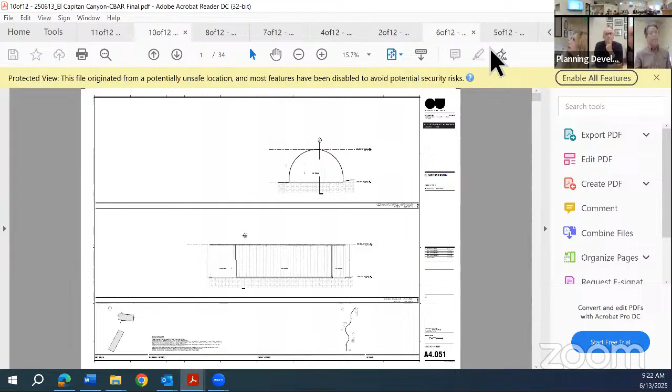Yeah, do you want to start at the very beginning? Okay. It might be easiest just to start wherever you want to. You want to go to section 10 and then we can get through the meat, and then we can come back and recap and go through that. All right, so section 10.

Unless it's Alan, you may not have been here during the last one, but we did have some comments about how the exterior was going to be detailed, some of the wood siding and some very specific things to make sure it's detailed right. So right here. Yeah, let's do 10, and if you can continue a few pages and get into the details, I'll start with that, and then we can go back to the beginning and do the full page flip, going to the 3 series.

These are all the technical building sections and elevations that you saw last time. You'll know when it gets boring. A couple more.

There you go. Whoa, back up. Yeah, go back. Okay, so when we were here last time, we were a little light on details, but we wanted to make sure that we were on the right track, which it looks like we were. So we've now invested in a lot of the detailing.

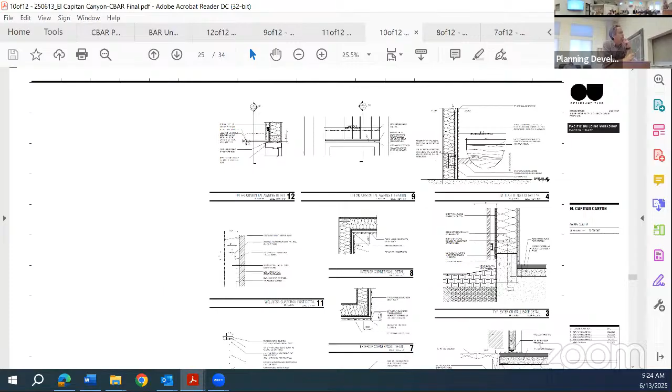If we zoom out a little bit and scroll down, it's really just all of the cladding and how the deck materials here are flush with the buildings themselves. Some railing details, but a lot of this has to do with all of our wood details like that.

This next sheet is the other one that was curious about. We have an integrated gutter detail and all of our roof detailing.

Our materials board - you've seen this one and approved it in the past for other elements of this project, but we had to rebuild it. We lost it after the last CBAR. I think it stayed here too long. So we have the same simple palette you've seen over other areas that have already been approved and are in the building department: cedar that's weathered, Corten steel roof, and bronze windows and door hardware. It's a real basic, simple palette, if you guys want to refer back to that.

We're not doing any eaves here on this part of the project. It's a wildland urban fire interface, a nice detail for us. It keeps the building really clean. You'll remember this is just a landscape driven project - a huge property with lots of trees in the surrounding areas. So these buildings are kind of background when you see that landscape.

Ready to spill down? So that's where the hidden gutters are. We have some living roofs - we've eliminated a bunch of them, but where guests or the public can look down onto the property, we felt it was really important to keep some of the living roof visible in some areas. So there's some of those things that have been figured out in coordination with waterproofing and landscape, and all of our other standard details.

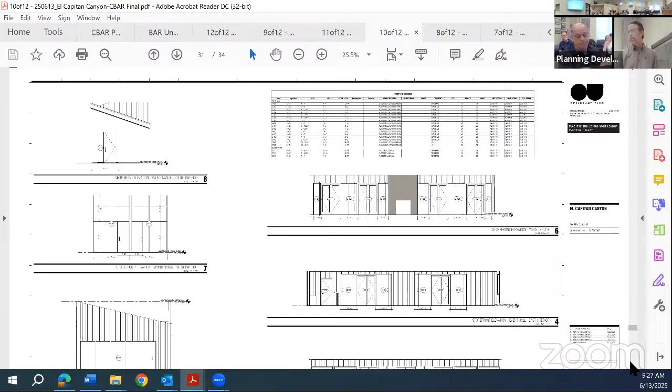Well, that's pretty much the level of detail we have. All these buildings are really similar, so we're reusing a lot of the details because there's continuity throughout the whole property. A lot of these details you've seen and approved at Area F over on the east side of Coastal Terrace, so there's really not much new here to see.

While we have this up - oh, here we go. This is the other one that had a specific comment about the window, so we wanted to put that up and make sure it's clear that's how we're doing it. Nothing new, didn't stumble across anything, doesn't change any of the designs you've seen. Just exciting roll down door details.

While we're doing the meat of this one, which is new material, I think you may want to go to number 11, and we can let Derek talk about the landscape details, which have already been approved, and then also show you the tree replacement plan, which is a really important component of this. After that, we can go back to the beginning if we want. Derek's got a hard copy of it, and I believe it's after this - oh, it's 12.

Number 12 is the tree replacement plan. This slows everybody's computer down.

It's a little hard to see, but you can see here all these little dots - those are all new trees. If you look at the interior of them, it identifies the tree by type and by size. So the important thing for you guys to know is that we aren't proposing any removal of native trees throughout the project.

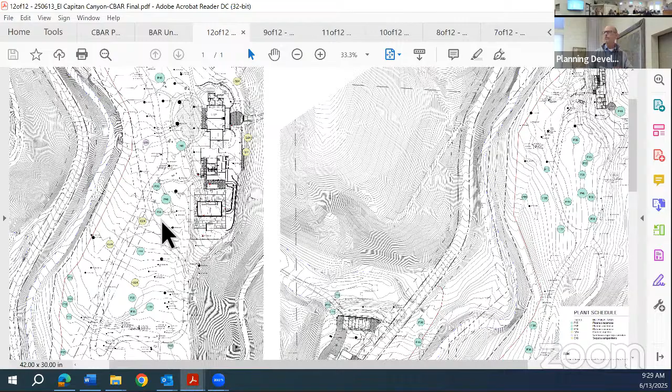Yeah, this is the whole project. This is all of it. That is awesome.

You're not used to seeing the whole project area squeezed under two images, but you get the idea. Thank you, thank you. I'll leave it up.

So let's see, I think we're still in landscape details. Do you want to go back to the beginning and rehash it? Start at the beginning and go through everything, because this is for final.

So when we came in for prelim last time, as you're teeing this up—we've been in and sort of know what's coming—we had a pretty advanced set last time. Anything that was picked up in the details didn't merit any changes to what we saw last time in prelim, or approval on prelim.

Orientation for everybody of El Capitan Canyon. We're here at Area 1. I think you guys have all visited these. We'll just keep it going for our talk.

The first set comes from Civil, and as a reminder, you can keep flipping through these. This is showing all of our constraints mapping for flood, riparian area, oak woodland, and everywhere the early siting was approved and how it was all determined.

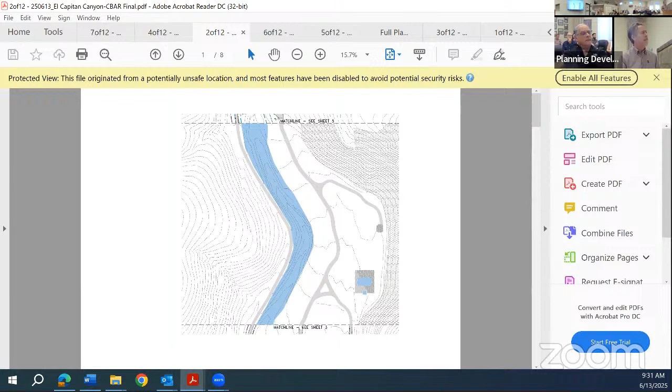Being really careful about the habitat, topography of the canyon, and what's existing. No changes to anything in there.

This is the constraints map. Everything on a white background is a safe zone to land. All the previous approvals were approved.

Previously, what we just saw was the night sky lighting diagram and the materials, which you see in physical samples up here, and here's some more illustrative examples. This is on the landscape side—the materials of the entire landscape palette and all the fencing.

The first section we look at is a back of house area with a maintenance building and a cart barn for all of the electric carts as we electrify and remove cars from the canyon. There's existing conditions which you guys toured and wanted more information on at one point. This is what's there now.

And this is what's going to be there, which is a shop facility, and an area to rent bicycles or e-bikes or other ways to get around without a car. So you'll see some images of that.

These things pop up, and there's still some cabins in this area as well. But this is all back of house.

This is more of a due diligence item. Understood.

So here's the architectural details of these two structures. This one is a Quonset hut—it's simply a corrugated arc with a roof.

And we're getting into the site plan of the family pool. Oh, here we go—here's the rendering of that back of house building. Again, it's actually much more dense with landscape, but we wanted to show you guys the buildings in these renderings, so we've cleared out a lot of the landscape so they're visible.

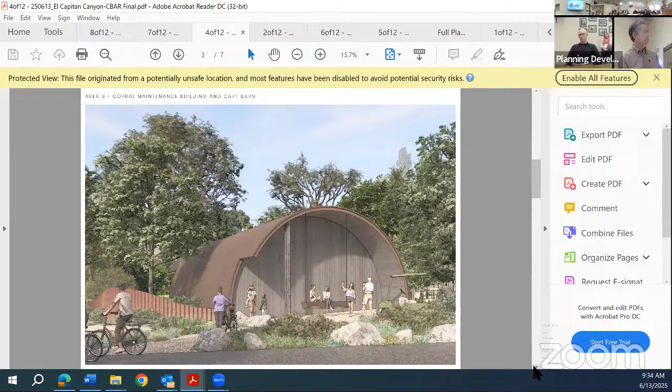The bare bones forms of these buildings, so you can see all sides of them in context. The elevations flattened out don't show a lot of articulation.

Existing pool, totally overcrowded. So we created a family pool—it's a little more friendly to children and infants and all that.

So it's a picnic area, playground, lots of natural features for kids to run around. And that's a shallow pool—goes from 0 inches depth, kind of slowly sloping down, so it never really gets a deep end or anything like that. All the lighting's shown throughout.

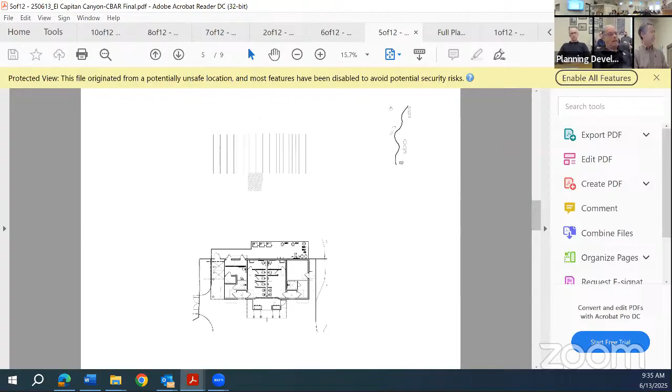There were some comments on the lighting. We brought all that in, had all the photometrics done, so that all seemed pretty good. And of course, you guys all know, as I've said over the many years, we're trying to keep it dark.

Next up, the canyon is kind of the largest site for events. It's a recreation hall, which is where the original, existing assembly spaces you guys have seen are kind of makeshift tent structures. That gets replaced with an actual recreation hall that has some food service, and there's a pool there that's more of the adult pool, but everyone's welcome there. So this is that section.

And this is the area where we did some ash trees and neighbors. The same information might be in the next one, just not illustrated, so we'll try to move on. Not as sexy, but you can see in the red X's where those ash trees were. And the same footprint of what you visited already.

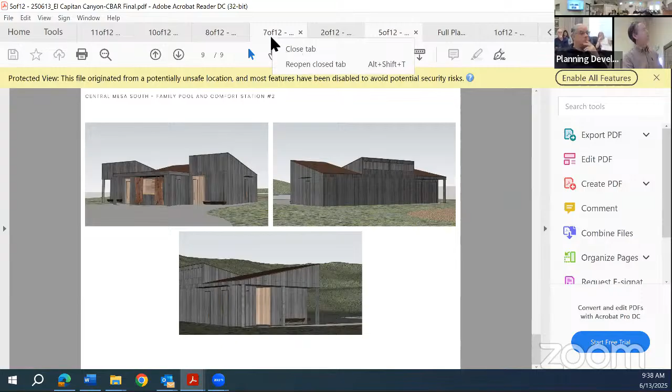The north part of that complex, which is the assembly area. You saw last time we had confirmed since then all the ADA and access and paths. That was the one thing that Freedom was going through, doing all the accessibility layer to the whole property. It added a little bit of work previously, but all that was accommodated.

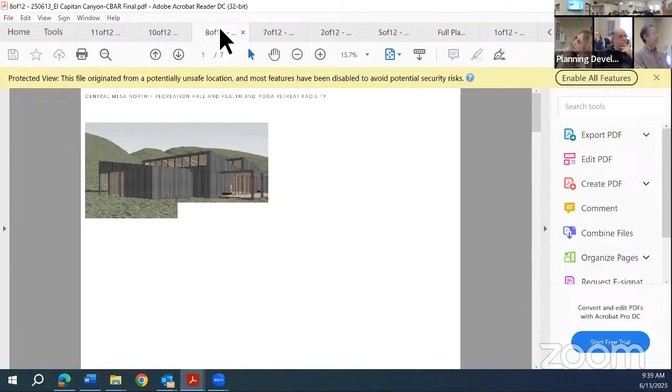The south end of that complex, the second building there, has the pool, fitness area, and kitchen. The pool will take some of the pressure off of the market and restaurant down in the coastal zone, which will probably be returning pretty soon. Much shorter set.

Okay, at the tippy top of the canyon is the wellness center. So when we were here for prelim, we had some ADA and access issues on that, so we had to adjust that building in the last one we presented. And that's all worked out just fine in details, with all the other consultants - structural and civil. So no changes to this either from the last one.

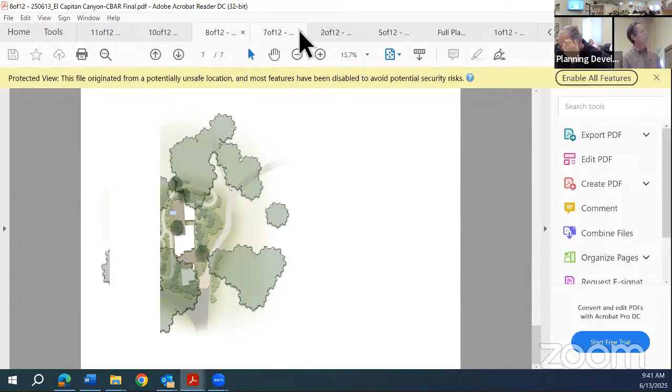Nine. There's one closer to seven. And we looked at ten already. So this is the layout for that wellness center with all the ADA paths that really have an impact on us. But as always, everything that comes up, whether it's comments or things like this, those get incorporated into the projects.

The trees don't look the same, but you can use your imagination on that - they're feeling a little bit like tree houses. And this is where we picked up really for the meat of this presentation - the final details. We have illustrative materials, and we also have more technical elevations through these sections, again from last time, just to make sure there was total clarity on what everything is and also what materials are where.

And we did ten, we haven't done eleven. Eleven also had no additions - landscape, Arcadia, as usual, was ahead of the game and had everything already detailed in prelim, so nothing was missing. So that's kind of it on that one. Was that it? I think we've now touched every page. Any questions?

Do we have any public comment? If you're online and wish to speak on this item, please raise your hand. We don't have anybody in the audience with a raised hand and no public comment online. Okay.

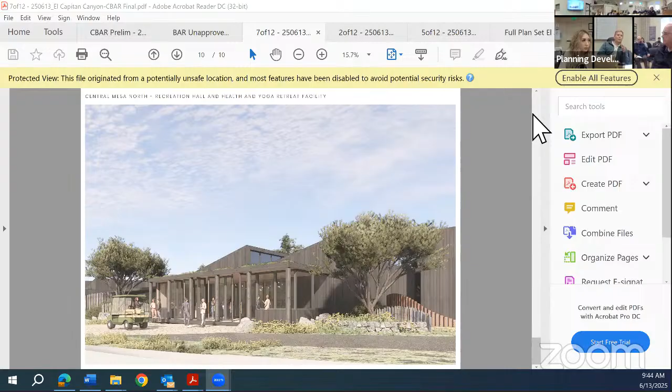There were a couple of options shown for corner conditions of the wood and how it interacts with the corner - miter versus flapping, with soffits doing one thing and walls doing another. As a final point on what we were talking about last time, just be careful about where the miters show up - I think there was one soffit that showed a miter, which isn't ideal. Miter is actually pretty risky when overdoing that. So we can pick - totally, miters are especially risky at those lengths. Take a magnifying glass over last time, but I appreciate the thought you put into the variable size of stuff. And that corner detail, we just wanted to leave it in there because maybe we want a full board on one, or maybe the one that's too wide we want to split it - so that's why we put them both. Okay, but I don't know that specific - I haven't looked at it, so just something, you know. Yeah, I appreciate either comment. Needs a red mark.

Any other questions? Bethany, was that a formal comment? And if so, could you repeat it for me? No, it's not a formal comment. Okay, thank you. I'll make a motion to approve. Second. Any further discussion? All in favor? Aye.

Okay, thank you very much. We're used to saying if they will see you for the next one, but I guess there's no next one. Not on this one.

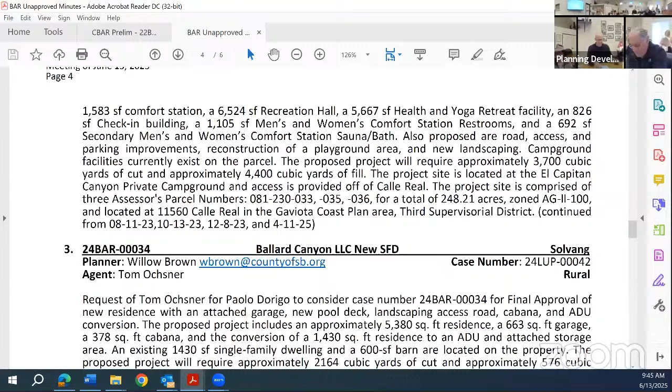Item number 3, Ballard Canyon LLC, new single-family dwelling, 24 bar 34. Is Tom online? Anybody here for item number 3? Yes, there you are. Thought I saw you.

So, the comments from last time: on the north elevation, be careful with the height limit lines. Change the light color plaster within the gable on the east elevation to match board and batten. There was a lot of discussion about this, but it sounds really fiddly, though I think it pulled everything together. Compactness and site planning is a positive with respect to the hillside ridgeline. Consider how color ties into the fenestration and details. No glaring problems with the architectural design, pleasant project. Reduce lighting around the building and make it more discreet, more sensitive to the surrounding area—for example, eliminate landscape lighting on the wall near the pool. Just as an example.

All right, will you walk us through those comments? Is it divided into, what, how many comments do we have? Five. Okay, let's go to civil part 2, civil landscape part 2. I guess there's two parts to each. And then I'll go to the architectural, the fourth one—or, oh, was the architectural in one? Let's go to the second architectural one. Let's kind of put it together.

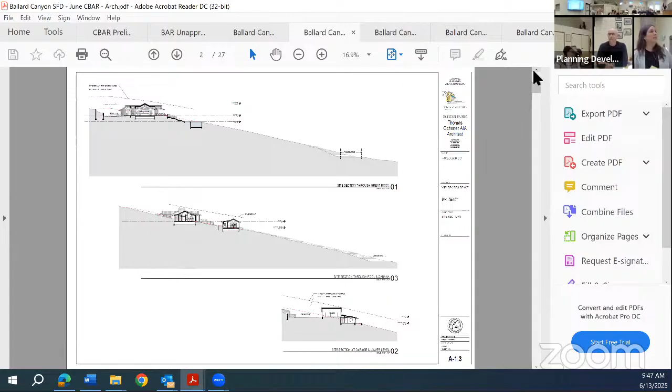So we added a few of the proposed height limit lines where we have the drive court area. This is that height limit line at the drive court, as well as, if you scroll down to the lower section, we added this for the grading at the drive court for the proposed grade. And then we're also showing that on the section. So let's go a few sheets down, past the civil.

That's your exterior lighting too, isn't it? Yeah, I think we'll do the lighting last—I'll just go through the comments in order. No worries. A few more pages, actually, I think it's probably keep going one more. Keep going. Okay, I'm gonna stop here while we're here.

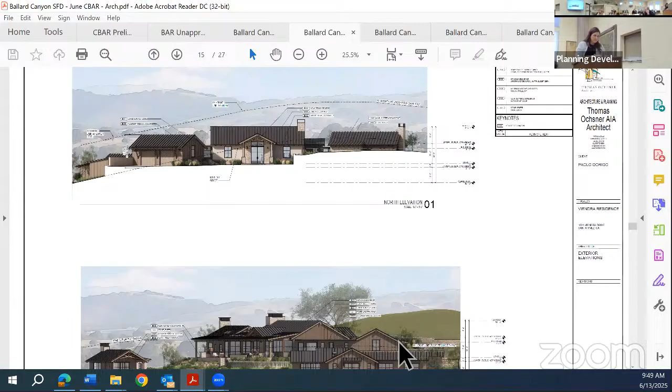This is the portion of the elevation that we were talking about last hearing, changing the material to the wood material. Yep, so we made that adjustment on this plan. And then, yeah, that's the same one down at the bottom there. So that's the second comment.

And keep going. Anthony's pretty strict on the windows. Anyway, gonna try it out. And I think that's it for that one.

Okay, let's see—the color ties into the fenestration and details on the first PDF of the architectural. Last time we were here we brought the color samples, and we also provided another rendering of the proposed wineberry window color. If you go to the first PDF on the set, it should be a few pages in.

I think there's another—oh, I did PDF. The architectural was just one. There's a cover sheet and that kind of thing. Okay. Just click on the various different ones if it's where we're at. This one will show you the difference. Yeah, there's just the one architectural PDF—there's two landscape and two civil, but one architectural.

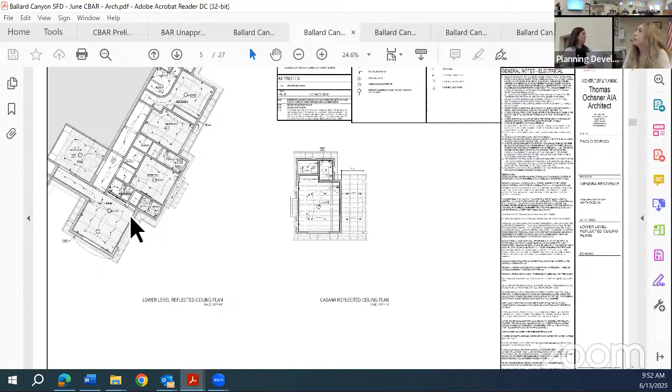Keep going up. I think the main portion we were talking about was we had two sconces on either side of this awning, and so we removed those. We're only providing the required sconce lighting at the sliding doors along the side. And then Scott also updated the landscape lighting.

Let's see, I do want to find that material board somehow. Yes, because you need it. Could we hold this up and see where that sheet is? This must be another set because there's no cover sheet in this drawing set, and we just looked at that, so it's got to be in one of the other PDFs.

Could you please close the door? Thank you.

We'll just start looking on the others. I'm looking at the others too. I don't remember seeing it - I mean, I saw it when you first opened it, there was the cover sheet there. Yeah, I remember that. Did it get closed somehow? No. Civil, first civil. Okay, that's it. Great.

So I'm going to attach these sheets until we get to the material board. Just down a ways.

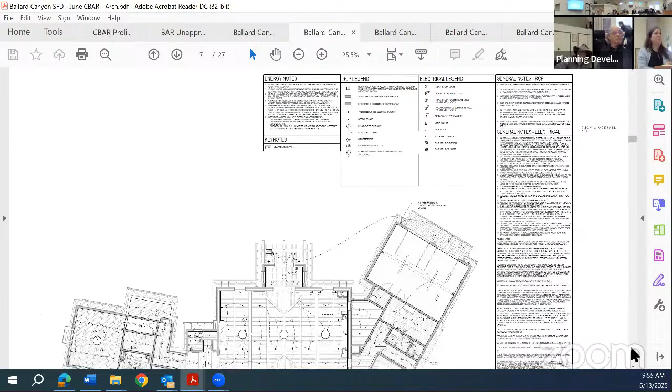So we have our lighting plans, which we reviewed last time - we reviewed the responses from the exterior. Our floor plans, which are pretty much the same as the last time we were here. Roof plan with all the details called out, the cabana floor plans and roof plan.

So I guess it's the file size too. And then we have our accessory structures, which are existing on the site. This was part of the planning application, that we're converting a portion of the existing residence to an ADU and storage area. There's also an existing agricultural barn that is part of the planning application.

The cabana elevations and some of the elevations from straight on. And then colored elevations showing the materials of the exterior. Main elevation, side, the master bedroom. And these elevations, as far as the lighting, that's all been updated for the new lighting plans.

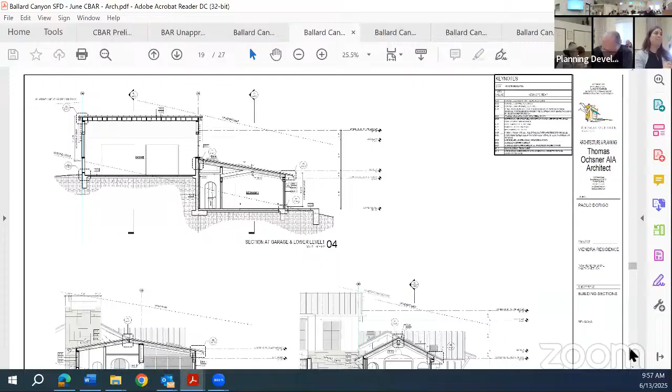Some of them we didn't update - I think there's still some sconces showing on the master bedroom that have been removed. But other than the sconces, that was the only change to that elevation, so that one's still showing, but everything else was updated.

Building sections. And then the renderings - so the renderings do have the updated lighting as well. And there's that gable end again that we changed the material.

Door and window schedules, and then our architectural details are coming up next. That was one of the requests from the previous hearing, providing the detail for the chimney cap. And then we have plaster, stone veneer, as well as a composite siding material that we reviewed at the last hearing. And then we also have the dark gray standing seam here. Our window details showing the clad windows and doors. And then some of the other finish details, the garage, flat roof detail, post bases and stairs.

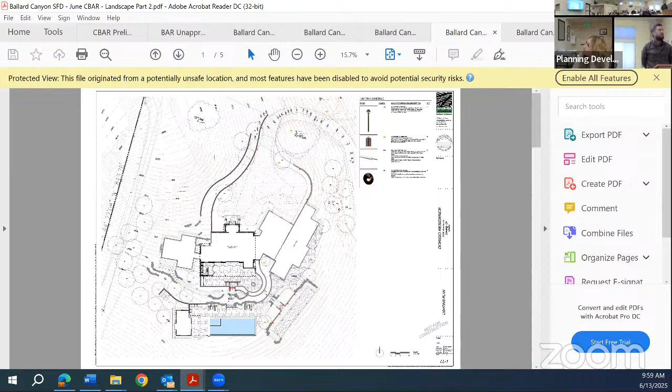Yep, that's the one. So the main comment was a reduction of some of the accent lighting, particularly the wash lighting we had on some of the retaining walls, basically just north of the pool, that fire pit area, those curvilinear walls - we had some wash lights on those. Those have been removed, as well as some of the path lighting where the blue dots are. We had some additional downlights from those trees - those have been taken off as well. So mainly we're just focusing on any sort of path of circulation, focusing on visibility as far as steps, pathways, and reduced quite a bit of any sort of additional accent lighting. Let's go back.

Planting plan, and no other real changes have been made. Planting, irrigation, and other thoughts are all in there.

All right, thank you. Any questions? Yeah, I have a question.

The wineberry color is still on the materials board, but it seems like it's not on the elevations anymore. Is that on the structure that's being renovated, or is it gone? It's on the whole structure. I think it's a line weight thing, and that's why we did the blow up of the 3D view, because when it's so far away, since the structure is so big, the line weights kind of wash it out. Also, in conditions where it's in shadow, it renders pretty darkly, and when there's direct light on it, it looks a lot brighter. So that's why we tried to show both conditions, one with direct sunlight and one more in shade, to help with understanding of what that's supposed to look like everywhere.

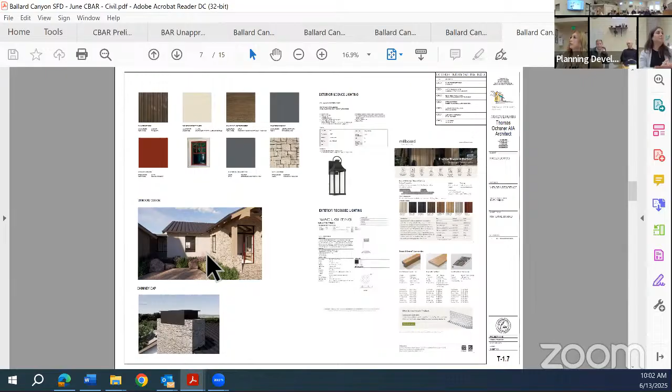Okay, public comment. So if you're online and wish to speak on this item, please raise your hand. See no raised hand, so no public comment. And no one here for this item, public comment?

For the discussion? I'm good to go, I'm good to go. Make a motion, I'll make a motion. I'll second.

Okay, I would like to amend your motion. Before the set is put into the record as the final set, you need to update those elevations, because if anybody comes back and pulls them, they're gonna go, there's lights here. Could that be a condition? That's a condition of the approval of the motion, part of the motion. You get that, Nicole?

You want the elevations updated to show what? The correct, well basically to omit the lighting fixtures that they have omitted, because they just didn't update the elevations. Okay, got it. So before it becomes registered as the final set, as a condition of final approval, they need to submit that to the planner to include.

Stephanie, you ready? I can read the comments from last time. The story poles and site visit provided the board with a lot of information and demonstrated the size of the development. Consider grading to lower the structure or parts of the structure into the site to help alleviate skylining if supported by the planner. Would appreciate more stone, addressing the increase in grading amount. Would appreciate more stone and less concrete for the wainscoting. The board prefers stone siding as referenced on sheet A12. Anywhere there is an extreme unnatural slope transition, please revise the grading to replicate a natural, more gradual form.

Update the elevations to accurately show the slope changes and retaining walls. Return with a physical color material board. Please also submit a color board as part of the PDF plan set. Okay.

Take it away. Okay, hello, thank you. My name is Jolie Law, I'm an architect with the RRM Design Group. Oh, there, okay, sorry, hopefully you can all hear me.

So we'll just start off with comment number one. We wanted to say in response to that, Brett Jones and Angie James had worked with Francisco about this item, and Francisco had looked everything over and determined that he had no concerns regarding the height of the structure.

No, Francisco, is he on? Yes, he is. Okay. Hello, good morning, Francisco here, County Planning. Did you need, was there anything you wanted to let us know before she gets more into her presentation? I just wanted, yeah, thank you for asking. I did want to point out, I went out to the site after the last CBAR meeting, and I documented, took some pictures of the story poles that were there. I reviewed them with management, and we confirmed we didn't have any concerns with the height. Okay.

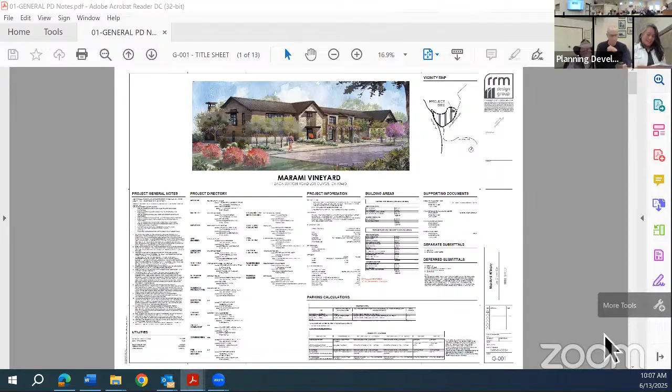Regarding the comment that we would appreciate more stone and less concrete at the wainscoting, and that the board preferred stone siding, I wanted to say that we did add additional stone to the overall building, but the way that we...

So we had to split the file several times. The best would be architectural volume 1. Okay. Did they not open? Oh, they're here, just like that.

I think in that PDF it's 9 of 11. Yeah, because it's not there. Oh yeah, it's because I have them over here so they could start downloading. There you go. Pages 9, 10 in the PDF. A201 and A202. That was 201.

What I did want to say as far as the stone goes, and the way the design of the building works, we have been using the stone to really designate hierarchy within the spaces of the building. So the main entry gable is completely stone, front and back, and that stone actually carries into the inside walls of the building, so from the interior you'll also see that stone.

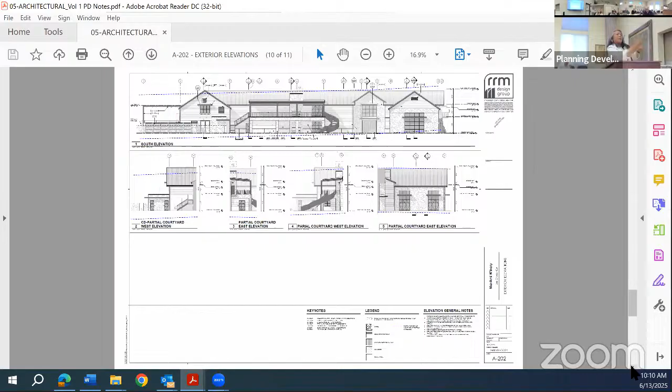And then when you get to the production area, if you go back to the other page, there is a further reduction of stone use. As you can see here, this is all stone at the bottom part, but then the rest of that is siding.

The other thing we wanted to comment on is that these buildings were definitely meant to have a nod, as far as form and shape, to agricultural structures, more traditional agricultural structures. We noted that traditionally there were often concrete or formed concrete bases on those kinds of buildings to provide protection from tractors and farm equipment and things like that.

So we stayed within that idea of keeping the concrete wainscot at the bottom for most of the building, and then over in the production area that concrete area rises up. But rather than being a more industrial concrete, we're using a much more refined finish, almost like an acid etch or a light sandblasting. We've used integral colors in that concrete, so it's more of a tan tone that actually picks up a number of the tones happening in the veneer, which we'll show you as well.

One of the comments was to update the elevations to accurately show the slope changes and retaining walls. That would be the next presentation, not these elevations. This was just regarding comment number 2.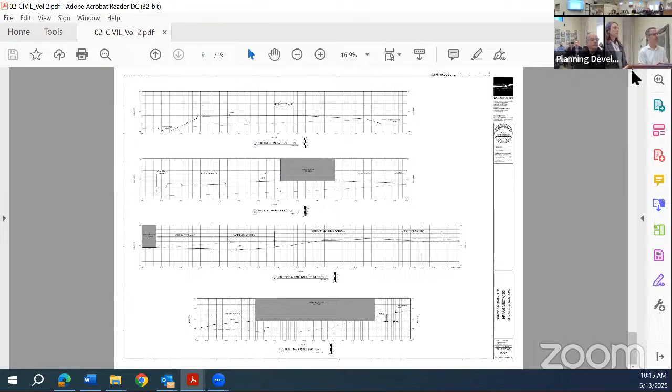On the east side of the building, we have a wall feature. When you look at the cross section, it's a little exaggerated. That wall feature, that undulating form, is a short wall, 3 to 4 feet max, that meanders on its way to the north. Those elevations have been updated to accurately reflect that grade transition, so it will be a wall at a person's scale, not a tall feature.

When you look at the cross section, sometimes the truncated height of the building doesn't really show that the wall is 4 feet tall, so that's been adjusted. From the property line side, you wouldn't even see the wall. From the building side, it goes from 0 to max 4 feet and back down to 0 again. We have a couple of renderings to show some views of that wall.

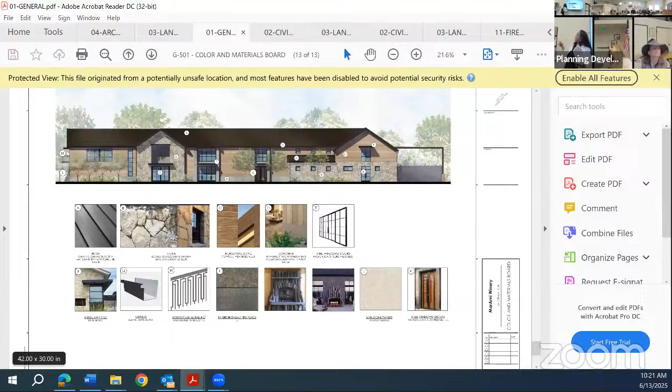Our windows are steel windows with a grid pattern, also going to be in the same dark bronze. We have metal awnings located around the building, which are also going to be the same color as the windows, so they all look as one cohesive unit. Then we have the deck or terrace across the back, which you can't see in this photograph, but it's going to have a limestone paver finish.

And then the stairs that are also coming down will have the same treads in the same limestone, with thin set with this dark limestone. The underside of the terrace, the underside of the roof, has an aluminum plank, like a tongue-and-groove piece that's going to fit together and line the underside of the roof.

And then we have some different accessory outside buildings that are more utility oriented. That is actually going to have a split face CMU pattern that is also picking up the same color palette that we're using in this deck. And then the railings are also going to be metal, and they will be the same finish called statuary bronze. So we're carrying the same palette, and it's all going to have a slightly matte finish. We're a little bit limited by powder coating, but we're going to get as matte as we can.

Okay, and I think that is it, unless anyone has any other questions.

The fireplace surround materials - at this point we're looking at a natural stone, probably a basalt, something like that. But it's just something that will be sort of dark, a dark kind of charcoal, something that will accent.

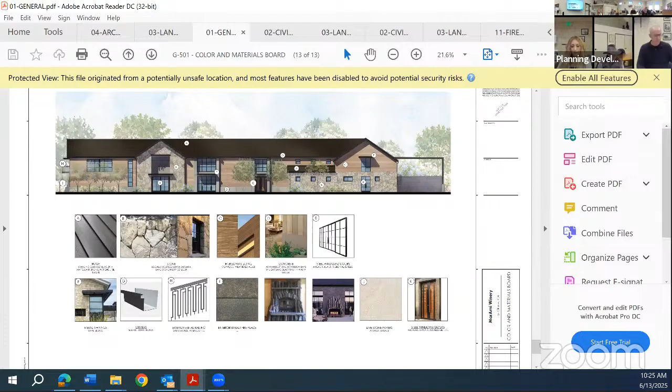There were some changes, as far as I believe the floor plans were changed a little bit. I didn't get into the weeds of the actual changes, but when it was resubmitted, it was indicated that there were some changes. So it did receive preliminary approval last time, so we were hoping it could get final approval this time.

Okay, I have one more question. Are there any noticeable expansion joints that you can think of on the major elevations? I saw the details in the architectural drawings, but I was just curious if there were any broad swaths of elevation where you'd actually see those.

Not really - we're trying to keep them as minimal as possible. As far as the stone, for support purposes for the veneer, we actually have some metal angles in there, and we're hoping that you'll just see this very, very thin line at the edge of the metal angle. We're going to probably put a black anodized finish on that so that it stays more subtle and a little more contemporary.

And then on the siding, they said it's every 2 feet or something like that, so we're trying to minimize them wherever possible, but we're sticking within whatever the manufacturer suggestions are.

Could you walk us through very quickly the changes to the floor plans, the revision that I asked Francisco about? The project had received preliminary approval, and they agendized it for revised preliminary, which usually happens when you have quite a few changes, or a substantial change, or a lot of little ones. So could you walk us through it?

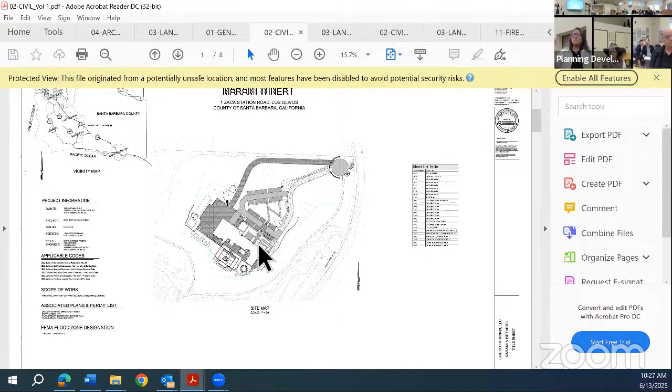Okay, yeah, I was going to say the bathroom entry changed a little bit to meet ADA code - to meet clearances and things like that, and mainly shifting things around to meet clearances for accessibility. Okay, yeah, that's it too, that's why I was asking about that. Okay. Okay.

How many of these are there?

Right. Do you need to go through the whole set since you're here for final? Do you have your detailing and all that? So why don't you just start at the beginning? Whatever we haven't seen, let's just take a look at it real quick so we can get through it.

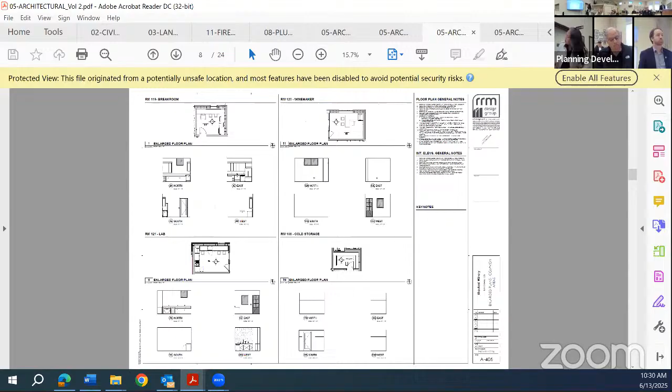Next is the enlarged plans and interior elevations for the common areas, this being the barrel room, as well as the commercial kitchen spaces, enlarged plans for the lobby, enlarged plans for the production area, and enlarged plans for the wine tasting room, with interior elevations for all of those. Enlarged plans for the private tasting rooms upstairs and interior elevations for those areas.

And then again the wine tasting, and then these are details, enlarged plans regarding all the awnings on the exterior, the metal awnings. And then this is the wine production equipment plan, as well as the wine production catwalks within the wine production room. And then this is a signage plan, first floor signage plan.

Details, architectural details. These are our window details at all the different finishes. So architectural window details at the stone veneer, at the siding, and there's also one concrete bay. And then these are interior and exterior door details.

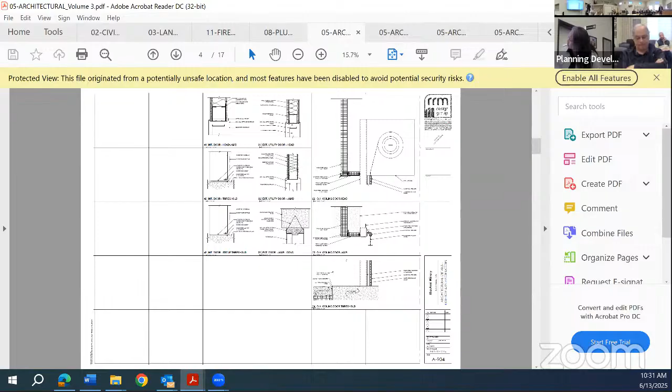Our roof details, standing seam metal roof details. Again, additional parapet and roof details. These are the stair railings and stair details. These are exterior details, sorry, balconies.

Slow down a little, we're supposed to be looking... balconies, and I thought we were. No, these are the ones we're supposed to be looking at. These are the terrace, this is the roof above the terrace. These are details for that, connection details. Okay.

And these are enlarged wall sections. Again, additional enlarged wall sections. There are a lot of wall sections, a lot of transitions through different spaces, though, and they're addressing eave conditions and things like that. These are interior details.

And these are some interior ceiling details, cove details, recessed lighting details. Looks like you've got a... And these are the signage, the graphics, predominantly for accessibility and exiting. And then these are our wall types.

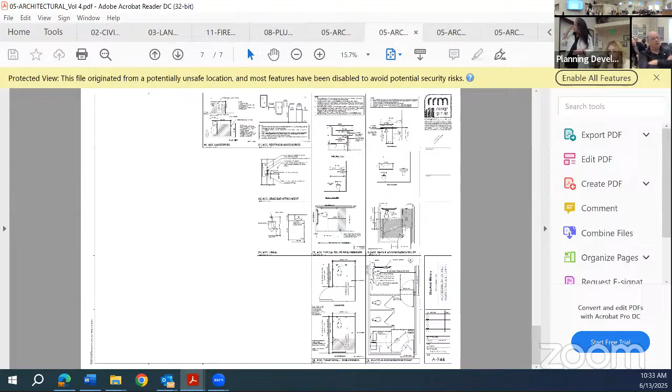And do you have landscape? Okay, we go on to the L sheets, right, for landscape? Yeah. I'll just skip through, start out.

Back portion, and then we have some attachments as well. This is the play area, labyrinth area. The event space. All our details, walls, hardscape, this is the gate detail, more walls. We have a trellis at the entry with a bike station.

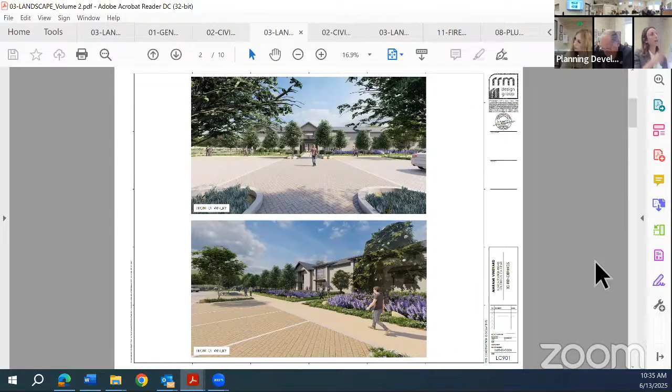If you have questions, if you want to keep going, we just have some rendering of what the planting would look like in the entry. We're adding a significant amount of trees. There's our topiary garden and the front retaining parking that you already saw, and you also already saw the play area.

And then our irrigation plan, so we have our own row. This goes through both sheets of where our irrigation equipment is, the backflow and everything is to the southwest. Going... irrigation, front, back. And then we'll have our details for irrigation. Just keep going through it.

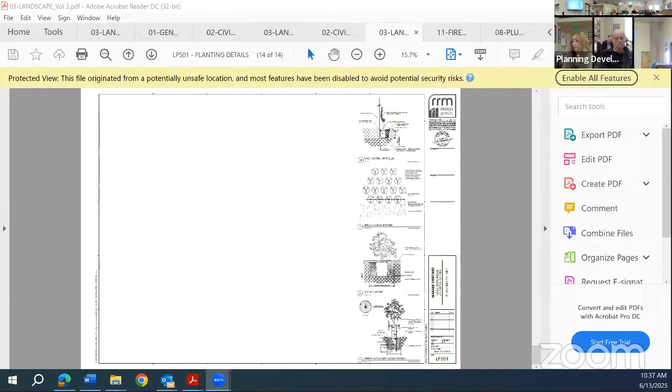All right, for the discussion, anybody want to make a motion? I'll make a motion. I'll second. Rise preliminary and final, yes, and that was a second. All in favor? Aye. None opposed. All right, thank you very much. Congratulations.

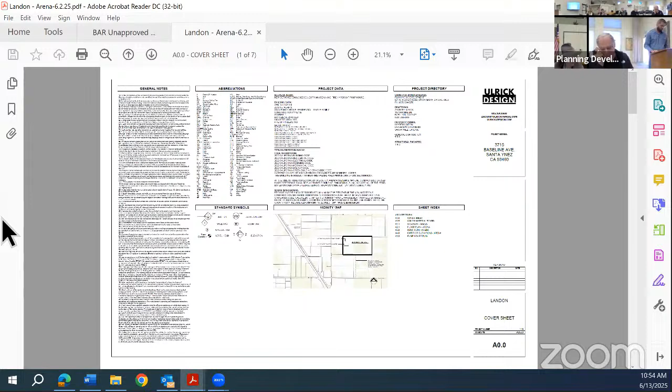Pressure's on. All right, so we made the site visit this morning, so this is the project plan. Let me read the rest of it. The site visit was required, we did that, story pole in the VTF, we did that, although there was a slight hiccup in the location. Please provide information regarding color and materials. Consider including colors of adjacent buildings so the board can ensure compatibility, meaning a side-by-side comparison. Pay attention to and reduce the reflectivity of the structure, especially the roof, as much as possible. Consider adding landscaping around the structure to reduce visibility.

All right, so we have the color board on the second sheet, which is really not much of a color board because it's just one color. You saw on the site this white accessory structure that we've already built. It's going to be the same order from the steel manufacturer, so it's all white. The difference being that this arena is a little larger, quite a bit. So we've got some breaks in the fenestration, right, at least. We've got some windows on the south and north end of the building, and we've got some doors both on the south and north end, but we also have big doors on the west and east. You want to take a look at the elevations?

Yeah, we can jump to the elevations. As far as, just give me just a minute, I'm sorry. No problem, Nicole.

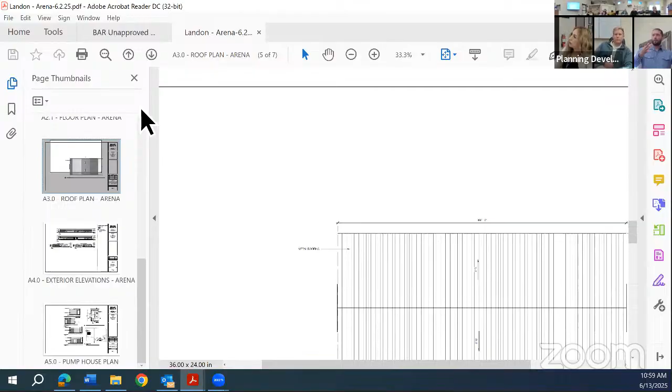The owner is agreeable to doing landscaping. It would be minimal and would complement the existing pepper trees and oak trees. We're considering doing oak trees to the west of the building. I think from our site visit you could tell the structures are very isolated on the property, so far inside that you really can't see them from neighboring properties or even from Roblar or adjacent streets.

We saw it from Roblar. You could see the roof in the back end of the existing building, which means you're going to see even more, because this one's going to extend beyond it. I'll show you what we saw — we saw the end of this roof here, from Roblar.

It's because Roblar is very far up, actually. Well, that's what it looked like, about 20 feet higher than the building, looking down at it. Well, there's nothing we can do, so it is what it is. But just FYI, we did find you could see it through the trees — it's like, oh, that's it. Some people would say we saw a little bit of it. You're just going to hit that nail until it's totally gone, aren't you?

Okay, so that's about it. I mean, it's a pretty simple project. That's all I got.

I think for the record we need to say that the story poles were off by about 25 feet. Yes, they were to the north. And anybody who went in there, we're all okay with the location they're supposed to be, especially since it's more ideal — it's aligned with that. No, I'm fine.

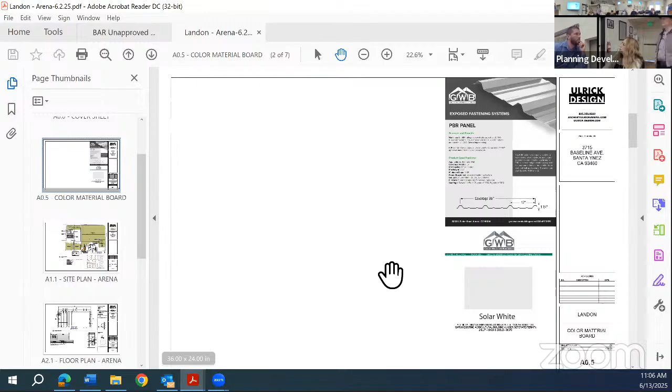Is it this one? That's very white. It is, very nice. I was really glad that it didn't match my paper space on the plan. It looks more matte. It does.

I'm hoping we can kind of lean on what we saw today, saw it in person. If you're absolutely sure, then I'd say put on here to match existing building. I have it. Yeah, so just do that, that'll be good for moving forward.

Nicole, you need me to go over anything or did you get it all? I think I got it. Okay, can I ask a question? We are coming back as -- we haven't decided yet, haven't got that far.

They're here for further conceptual. How do you want to see it return? With the development, moving forward, preliminary final I think it's contingent on the development approval, right, full board. Do that. Okay, so we're happy to see it return preliminary final full board.

Just to recap: continued planning, show landscape plan, show adjacent structures, show equipment with screening. Show new planting that was done recently, and adjacent trees, any new planting or adjacent trees in this area, just so we're showing that you're doing the same kind of spacing, tying everything in together.

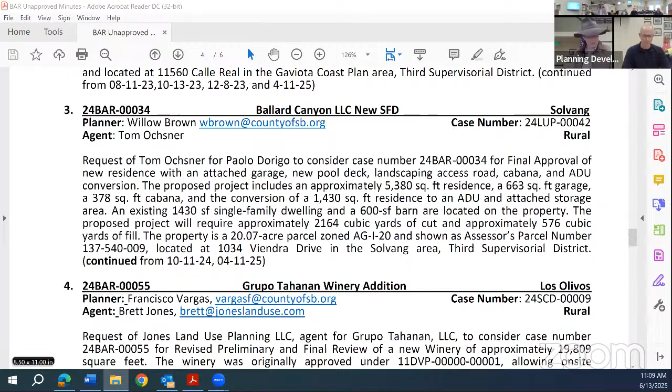Let me read the comments, and then direct your presentation to address those. We appreciate the detailed site and circulation plan provided at the last hearing, and the careful thought put into it. Ensure that WELO calculations are up to date on the plans using the most current format. Provide shade trees adjacent to new structures that don't currently have any. Consider additional landscaping to public and employee outdoor use areas to support public and employee outdoor use.

Thanks, Chair. We were at this board back in November and received positive feedback on the project design direction. We proceeded to Planning Commission, and the project was unanimously approved back in April. So we're back here asking for preliminary approval today.

If you open page 2 of the site and floor plans, that's the best overview. The project consists of the construction of 5 new equestrian and vineyard support structures, along with substantiating the existing previously unpermitted goat shed, which we've talked about before. The board has been on site and we've done reviews.

This document includes our architectural elevations and hillside ridgeline analysis studies, and as we flip through you can see nothing here has really changed from our last review. The architecture has all been designed with analogous materials, design language, and details to complement the existing agricultural structures on site. So nothing new here is new.

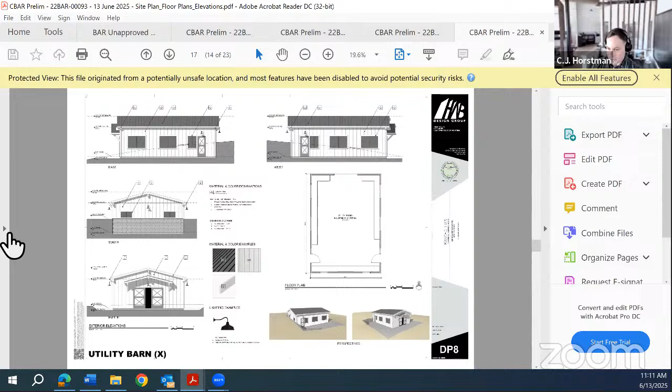We had 3 documents added for this review, 2 of which were based on requirements for the land use permit. The first is a site improvement stormwater control plan to flesh out localized grading and bioretention details for each building. I won't go through that since it doesn't address the board's comments, but it was provided in the submittal.

The second document added was a study of the existing lighting on site with a photometrics plan. This was a condition of approval by the Planning Commission, and these documents substantiate that the existing lighting complies, with no spillover onto neighboring properties and meets night sky requirements. We were asked to provide that for conditions of approval.

To address your comments, if you go back to the landscape plans that were added, there we go — there's the enlarged areas. The applicant proposed adding 6 California sycamore trees and 2 coast live oaks in areas that didn't have shade, providing a bit more landscape interest.

If you go to the next page, you can see some of the enlarged areas. There are 4 sycamores represented near this area that didn't have shade trees, out by the vineyard production building and a couple of the pens being proposed.

On the next sheet, this identifies another sycamore, though it's shown but not labeled. This just shows some existing landscape around buildings. The next sheet will show another sycamore.

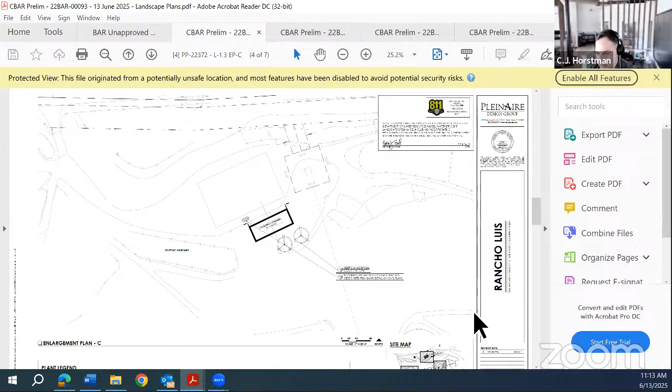Here are the 2 coast live oaks being proposed by our outbuilding down at the bottom of the hillside, added adjacent to that new construction. Finally, the next sheet calls out another sycamore located near that building.

So we've added those to address the board's comments about landscaping and shade trees. There are other substantially shady areas on site that we felt were appropriate. As far as employee areas, there aren't really any formal gathering areas, and due to the agricultural nature and circulation patterns, we didn't find additional areas to add hardscape or landscape without getting in the way of circulation.

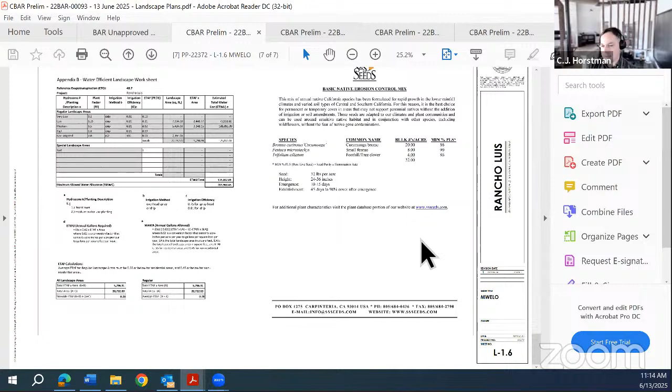This also includes the latest WELO documentation, with Appendix B for your consideration, in the latest format to comply with current standards. We're happy to answer any questions, but we hope to get preliminary approval today and come back for final approval with further detail as we progress with construction drawings.

Good. Questions? Yes.

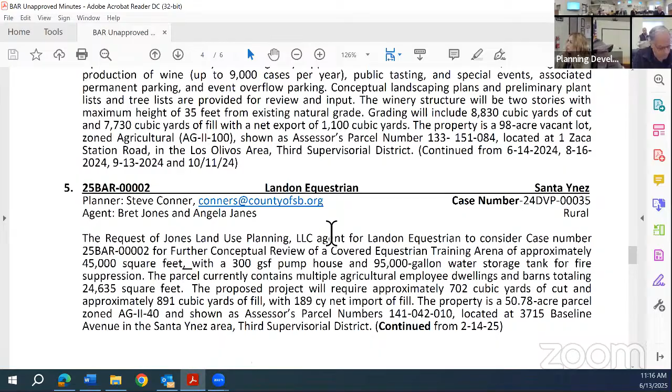All right, so I have some comments from last time to read while she gets the plans up. We realize this is your first visit to the BAR before a planner is assigned, and we look forward to reviewing all 4 elevations of the structures showing the proposed color palette. Identify whether buildings are monochromatic or if they have trim detail colors. You may wish to consider that Leyland cypress can have issues with root canker and that they grow quite large. Use of gravel likely will not allow for the provision of ADA accessibility. Look at a cell structure to stabilize the gravel. Consider axial alignment, endpoints to views, etc. Look at your WELO calculations, determine if the amount of water features, turf, etc. will work.

Okay, and so for the paint color, we will be monochromatic. And I think if you go to page 10, we have renderings from each side to give you an idea of what type of color.

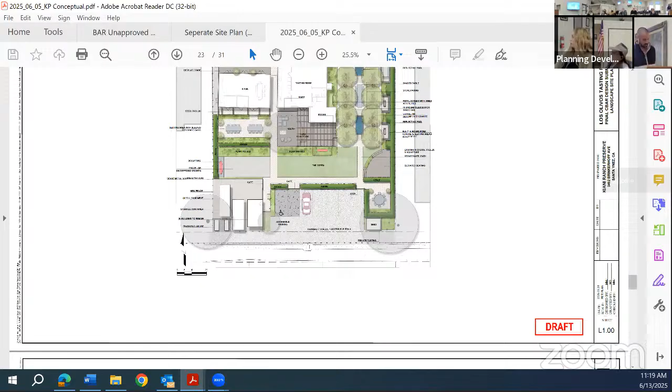My best advice is shout. Oh. I don't usually mumble, I usually project quite well, but she just dinged me, so I'm sharing the pain. Keep going, page 23. Page 23. That's not it. Oh, that's not 23? It is 23, I'm sorry. Sorry, there it is, okay, that's it.

So this is what we showed you last time, that's what it'll look like with all the landscaping in. And if you go down to the next page, we took out the trees and the hedge to give a better idea of what it will look like without landscaping, although I noticed this is incorrect in that it's all done in the lighter green — the left building, it's darker. But it still kind of gives you a general idea of what that will look like once painted, with and without the material.

So next was the consideration of the Leyland cypress. We are considering other plant materials for the hedge, keeping willow top of mind, and it'll also need to be complementary to the building color, as we want everything to be very harmonious and feel very natural.

Okay, gravel stabilization — we've added more ADA access throughout. You have a plan? That is page... that's 23. Oh, that was 100. And we plan to use the stabilizing substructures where there is gravel. Okay, because the plastic can often show. L100, so it should be— that's one. There you go.

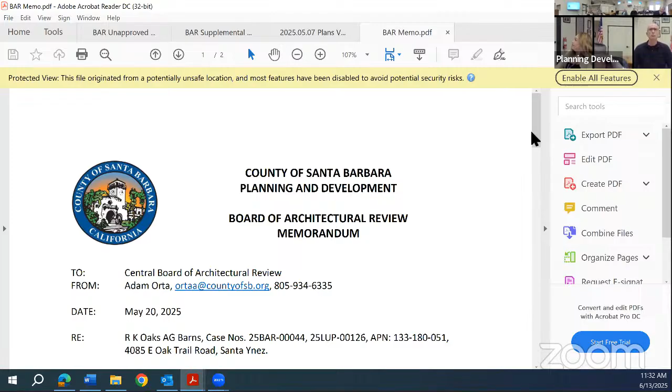Oh, it was Bret Jones, but no, it's Tony Cano. Will it be on this one? Okay. And then, yes, yes, right. Adam provided us with a planner memo. He is not online. And we're here for conceptual review, despite what the memo said. Yes.

Okay, good morning Tony, can you hear me? Hello. I'm here. We can't hear you, Tony, I'm sorry. My mic is off, or excuse me, on. Hey guys, can you hear me? Nicole, I can hear Tony, yeah, and you guys, but you guys can't hear Tony. I don't know what that means. Yeah, but I'm not hearing anybody else.

Yeah, because my system says I'm working just fine, it's audible. I'm not hearing you. Yeah, we still can't hear you, Tony. I know you're active, but we're not hearing anything. Well, it must be on your end because Nicole can hear me. Is it just muted on your end? Can't hear Nicole either. I'm just talking, can you hear me now? I can tell she's talking because there's a little green box around it. Can't hear me? Anything. Okay.

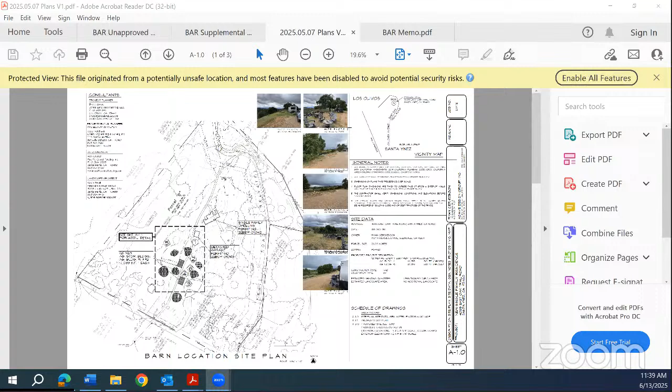Nicole, can you say something? Can you hear me? Oh, success! Hear us, I can hear you guys much better too now, actually, it was fuzzy before. Tony, yes, good morning. Are we back? All right, great, I'm glad somebody knows what they're doing because I wouldn't have a clue. She kicked Al in the butt and it worked.

Yeah, okay, all right, so we haven't seen this before, so go ahead and get us acquainted.

Well, I just have to thank the board. We're nearly complete with the construction of the main house, and that's turned out fabulous. So this is part of an effort to be consistent with the main house. If we could zoom in on the site plan, I want to point out that we're dealing with a very strict building envelope along this ridge. So what we've decided to do is position two smaller barns in lieu of a larger barn that would be acceptable to planning. Ryan Sorensen, the owner, has decided let's split it up. We'll have a better opportunity of screening these two buildings with the existing oak trees.

So you see that I've shaded the existing oaks there along the ridge, so that they're not quite as visible from the neighbors. We've also, once we get to the material board, we'll see that we're using the same color as the main house. Site photos there, you can see - maybe you've all had an opportunity to look at these - but the idea again is to use those existing, rather large oak trees as shading mechanisms, or screening mechanisms, pardon me. We can go on to the next sheet.

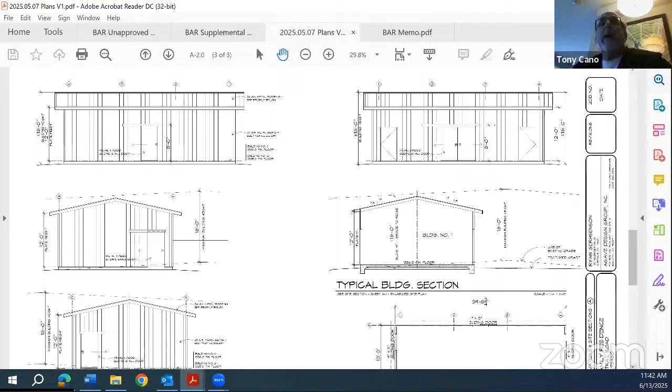So it's a very minimal package here: site plan, floor plan, elevations, as you can see. There's our metal siding in the lower left-hand corner of that slide. We're using a corrugated metal, and sliding access doors that will also be of a buff color, similar to what we've done at the main house.

If we can go back to the site plan, I wanted to point out some of the constraints along the ridge. If we could zoom in on that rectangular area to the left. There's an existing driveway from the main house, and we have a detached garage near symbol 1 for the site photos. You can see we've nestled the smaller buildings in amongst the existing mature oak trees.

I think that's pretty straightforward. These are ag-related, and there will be some animal keeping. Again, regarding the landscaping, it will be pretty much as is, and we can refer to the site photos if necessary. I think that concludes my brief presentation. I look forward to your comments.

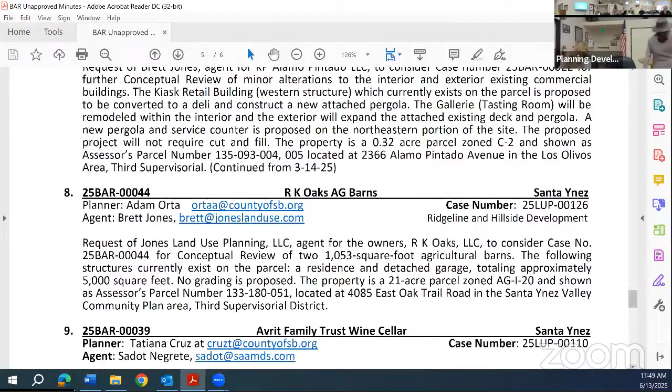So somebody step up and run the meeting? You want me to? I can. Come back in. Yeah, let's go. I'm happy to. Whoa, Lord, he's gonna get me. I'll come over and sit here. On my pal, okay.

Is somebody online presenting? Good morning, this is Sadot Negrete, Sam Design Studio presenting. Okay, thank you, the caregiver, the owner. Okay, hello, thank you for coming. Everybody's gotta be very loud. Okay, go for it. So we're good with the audio, right?

Yes. Okay, we have a 5-acre parcel on Ag 1-5, and we're proposing 2 structures. Since we are in a Ridgeline area, we needed to let you know that, and that's the reason why we're here.

The first improvement we're proposing is a wine cellar, which you could see a render elevation on the front page. Also, a tennis court.

The topography of this parcel is not unusual, but what happened is they cut the pad for the residence, and we have adjacent slopes on the east, west, and southern parts of the parcel. With the wine cellar, we're tucking it into the eastern part of the mesa, into the hill that overlooks the wine cellar. On the southwest portion of the parcel, we're doing a tennis court that will require grading, with a mix of cut and fill and retaining.

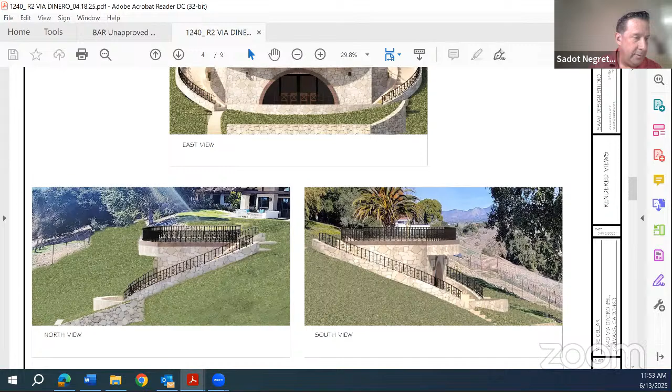So that's the cellar. Here's the topo survey. In the next page, you'll see the site plan that depicts the placement of both the structures, the wine cellar and the tennis court, and the distances between the structures and the property lines, as well as some cut sections. Is the tennis court marked 16? The tennis court is 8 down there. Oh, 8, okay, sorry.

Okay, go on. Sorry. Due to the fact that this is a mesa property where the residence sits, we went back and forth on the consideration of where the best place for the tennis court would be, and because of everything going on at the site, that was the best place we could place it. Not only that, but being tucked in closer to the valley, it tones down the lines of sight from everywhere because it actually hides it underneath.

We have some pictures of the area there also, and those views. I know we went a little further and took it into colors and materials for the wine cellar, and that's what you're seeing on this page. On page A2, we have the images of the valley that will house the tennis court.

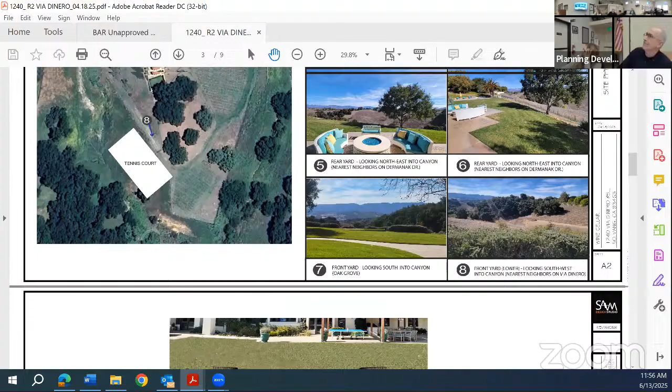So for view 8, you're standing on the mesa looking down into the valley where the tennis court will be placed. As you can see, the only thing visible from the adjacent neighbors is very limited, because right across the street, across the valley, there's a huge oak grove that screens everything on the lower side of the tennis court.

Any general questions? Yes, Andrew? Yeah, I have a couple.

Can you confirm if the wine cellar structure is positioned perpendicular to the end rows of the vines, or is it slightly off? Let me go to the site plan here. So the wine cellar is being placed perpendicular to the vineyard below. It wasn't aligned to agree with the building, but it was aligned to agree with the vineyards below.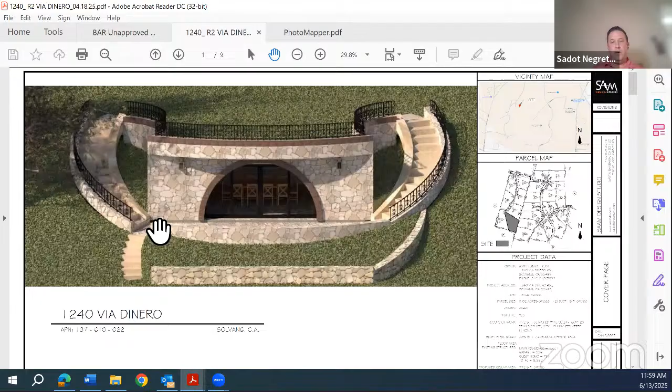And then in the tennis court area, I assume the topography is set up so it's really all fencing and there's no retaining walls going on? Well, we are going to need to design retaining walls. The way we saw it fit best is breaking it up between cut and fill to minimize the height of the retaining walls, both on the cut side and the fill side. So there will be, I believe, 4 tiered retaining walls, 2 in the front and 2 in the back, to accomplish this. Keeping those retaining walls, I think we could do it at about 4 feet high each. Then we're going to consider landscaping to screen the retaining walls and minimize the impact of the tennis court on the perimeter.

Do you know what the highest retaining wall would be approximately? I think we'll be able to do it, and we haven't engaged fully with civil and structural for the grading plan, but I think we could do it at 4 foot high retaining walls. What was the height of the wall? There's going to be a series of 4 retaining walls, 2 in the front, 2 in the back, and the face of them will be about 4 feet.

Okay, thank you. You're welcome. That's all my questions. Alan, any questions? No. Let's go to public comment.

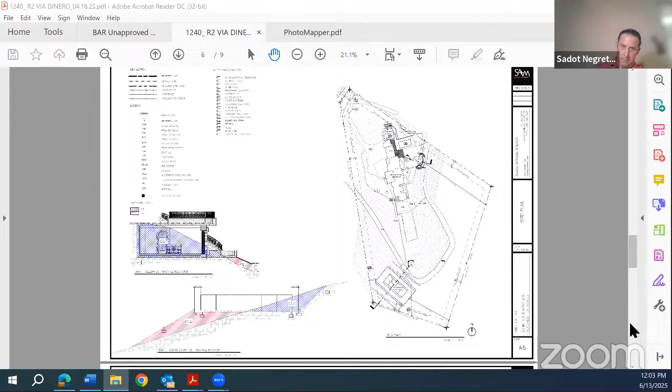How would you like to see it move forward? Further preliminary, further conceptual. You can go for that. Yeah, we can go more than that. I think preliminary. Well, they come back for preliminary.

I'm sorry, can you say that again? You got a good pass. Thank you. You're welcome. Okay, beautiful.

Conceptual to preliminary, which is the next step. Yeah, that's fine, that's good. You're welcome. No, thank you, very clear.

Okay, next item, let's bring Bethany back. I get it, I get it. Thank you again, enjoy your weekend. Thank you, gentlemen, ladies. All right, we're happy to. Yes. After the fact.

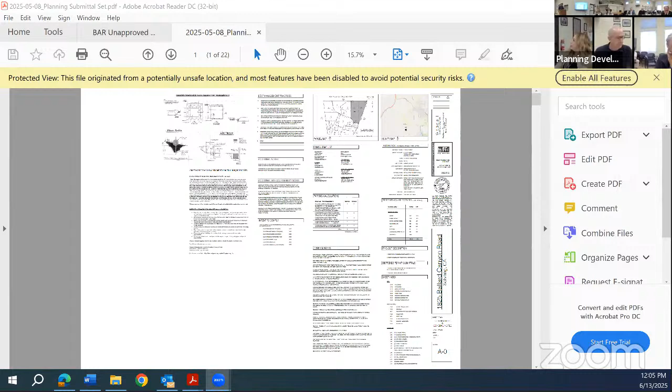All right, Steve Welton from Steps Land Use Consulting, representing the project owners. The project team is here with me and we'll present in a moment. I just wanted to give you a little overview of where the planning team is on it. This is a replacement structure of an existing winery.

The winery was originally built by converting an existing ag structure, and that was great, it's worked for a while, but there are definitely access issues for larger trucks for the capacity they're currently operating under. So the desire is to replace the existing cooperage with a new facility, which will replace an existing warehouse in the same location, which will be demolished and replaced with the new winery building. This is the existing one.

That's a warehouse that's going to be removed. The existing winery - let's go back to page two. That's the proposed. The existing one is right here. Okay, it's just - you see there.

It's a development plan amendment that we're requesting from staff, and we are currently in that application process. We got our first letter back. We're asking for a setback reduction from what the winery standards have on the northern side.

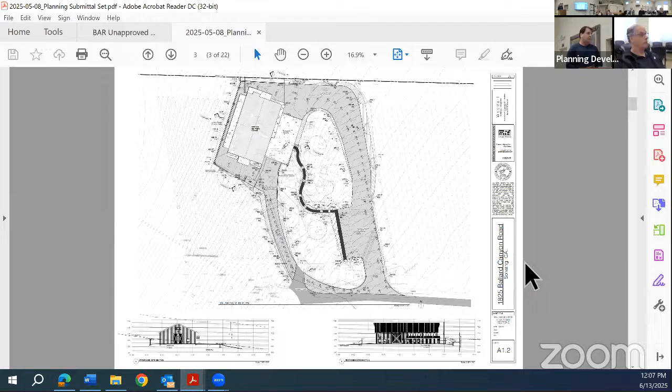The reason we're asking for that is we looked at numerous locations on the site to put the winery, but the one we studied the most that looked like it might work resulted in about 25,000 cubic yards of grading. Here we're able to get that down to about 2,500 and balance it on site, so we think it's a better facility.

We're working with the neighbors to make sure that they're okay with this, so far so good. Where are the neighbors in relation to what I'm looking at there? Way far away, you can't even see anything honestly, but I don't know if you have access to an aerial, but we can show you there.

Don't bring that up. I think the planner uploaded one. Let's see, okay. Yeah, there's basically nobody near it really. What about the two properties to the west?

This direction, you mean? Yeah, the setback we were requesting is for this property line right here, and then the nearest residences are basically people north of that. I think west goes uphill quite a bit, there's quite an elevation at the top there - about 100 feet taller than where we're at.

So I think actually with that, I'm going to go ahead and hand it to the design team to walk you through the architecture.

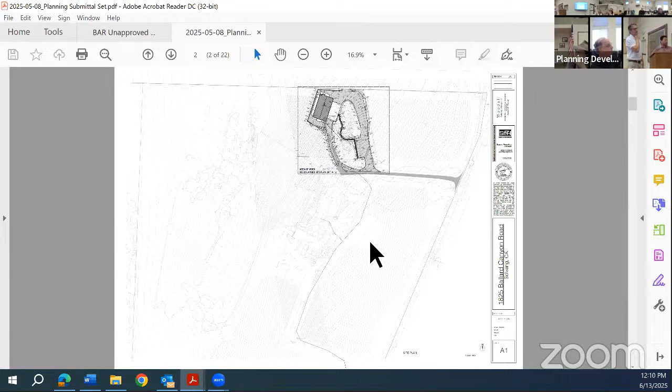You're gonna put it right up against the property line, specifically the northern property line. The idea was that there's already infrastructure there because there's an existing building, a barrel storage building that will be demolished, so it's in approximately the same location. There's already infrastructure there we've improved on. Also, as Steve mentioned earlier, when the grading map came out, there was actually less grading on this side than anywhere else we had potentially identified.

I just wanted to point out that we meet the structural setbacks. The setback waiver we're requesting is specifically for wineries, usually because oftentimes wineries have events and things like that. That's not the intention here, though, to have public events. There's already a tasting room down in that location. This is the production facility where they'll make the wine. The tasting room is going to remain where it is now, in the other cluster of buildings.

The existing barrel storage building is in the same location as this; we basically put this new building right on top of it. There's a really nice cluster of oak trees existing to the right of the building. It's going to help with screening, so it's pretty well screened from the street.

You can see access is now going to be to the east of the tree cluster, and that's for the bottling truck to come around onto the crush pad, load up, and get back down safely. But again, this is going to be a production building. There's some parking for employees there, and a pathway that gets them up to the building.

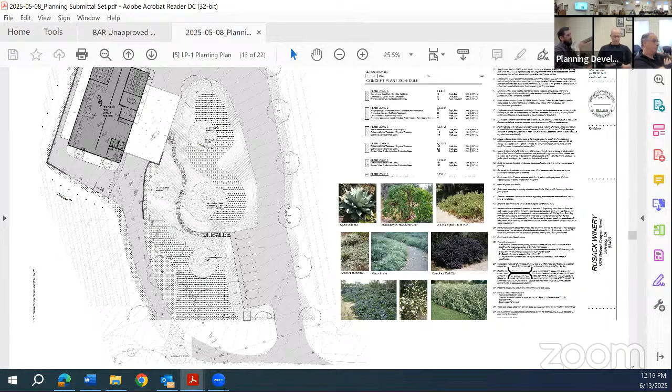We talked about the trees. We are providing some screening on the north property line, which would consist of some of the larger ceanothus concha and some coffeeberry, along with a couple more trees, just to help create a little bit of a buffer, but keeping it pretty low with grasses and ground covers, some mid-height shrubs throughout most of the property.

I might add that the northern property line is currently really grown in. There's a lot of mature growth on that line, and it's probably 15 to 20 feet high. I don't know if there are photo boards that came in with the planner, but that might be helpful too.

So that's the entry on the northern end of the property off of Ballard Canyon.

That's the cluster of trees where it says project site. So the winery will be on that cluster, and the access road will go in front of it.

You can kind of see the existing building back in there. There's probably another photo that shows it. And there it is.

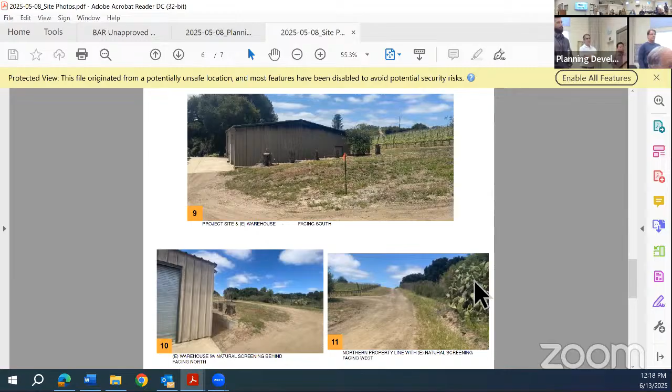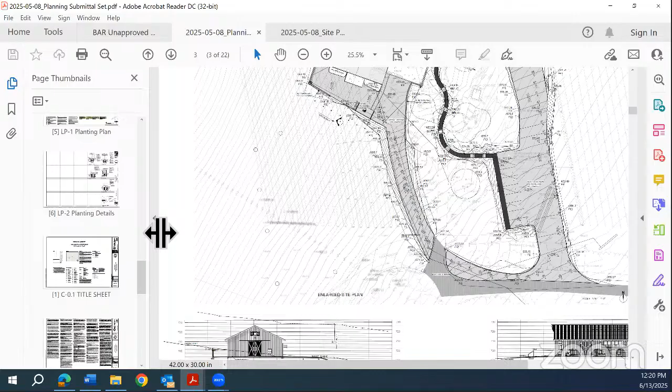I don't believe so. The setback and the reduction being requested is specific to wineries. They are meeting, like Steve explained, the zone setback requirement, which is a 20-foot side setback. The reduction being asked for here is specific to wineries - generally for any winery structural development, it's 100 feet from adjacent property lines, increased to 200 feet if the winery includes any public events or public tasting.

So the LUDC standard applicable on this site is 200 feet, but they are asking for a reduction of that. That decision is made by the decision maker, which in this case would be the department director, basically if they can meet one of the 5 listed findings which would allow the director to reduce the setback, then they can get that reduction.

But I don't believe it's something that, at least according to the code, this board needs to address. Okay, that was my question.

All right, Denise, you had a question? No, I just kind of had a comment - I missed the site plan, so. I'm going to go to the site plan.

This is the architectural site plan. It's bouncing around a lot.

Yeah, well, we've been having some issues. That took forever to load. It's a large file, so it's fine. I've been watching online, it's worse. You had an issue where you couldn't hear Tony, couldn't see him. No, I could see. There's a lot of stuff in the file and we try to compress it as much as we can, but then it's giving us issues with the PDF.

You can break it up when you submit it, it helps the planner. I think it's the hatches. Yeah, the hatches will often take over.

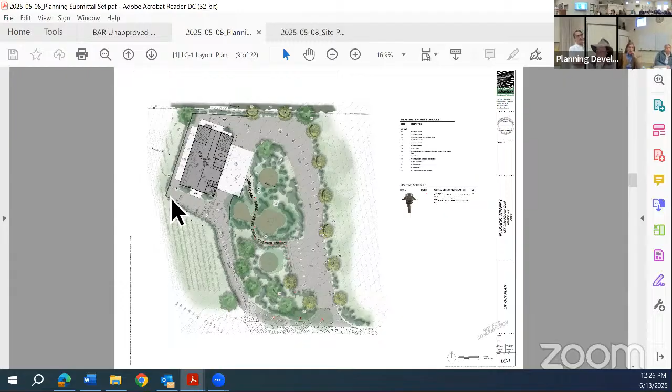Your access to the building is pretty wide. I'm sure you described it before I got here, but how wide is that large part of it? We need 20 feet for fire trucks, and the bottling truck itself is 75 feet long. Oh my God, yeah, it's pretty massive. So you needed that whole width?

There's no way to just narrow it or swing it out down. To get the cross slopes and everything to work, it needed to be that wide, and to be able to handle the radius of the turning of the truck. But yeah, we did a lot of studies on that with the civil engineers.

All right. Good, okay. How do you want to see it returned? So ready?

Okay, and of course, you're going to have to make your selections for your colors and materials and all that stuff. Yeah, they've got that on the landscape plan, and on the architecture plan too.

And do be sensitive with your lighting. Yeah, the lighting is going to be minimal, just for the operation of the place, and there is a picture of the dark sky. I saw that. It looks like you've got it pretty minimal at this point, so, typical boilerplate language.

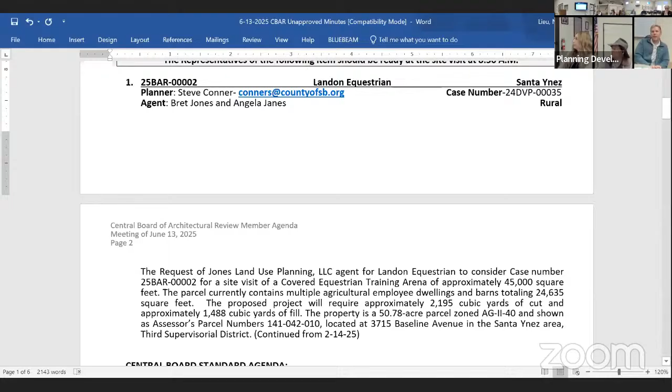Okay, so we did the site visit. Let's go to number 2. Yep, that's right, 3.

I did wonder if I should put more detail on the light fixtures to be omitted. Was there another sheet that was intended to match? Hold on a second- final approval granted on the condition that the elevations are updated to reflect and coincide with the reflected ceiling plan in the final stamp set.

No, you could change that to 'and or near the buildings.' Next to that, yeah, right under Roblar- I gave you a pass. Right under Roblar. No, oh she's like, oh sorry, and or, yeah, because I wondered. Show the proposed planting location, size, and species. Identify existing trees on the plan and adjacent trees in the area. I mean, I was looking at it, but I had stuff going.

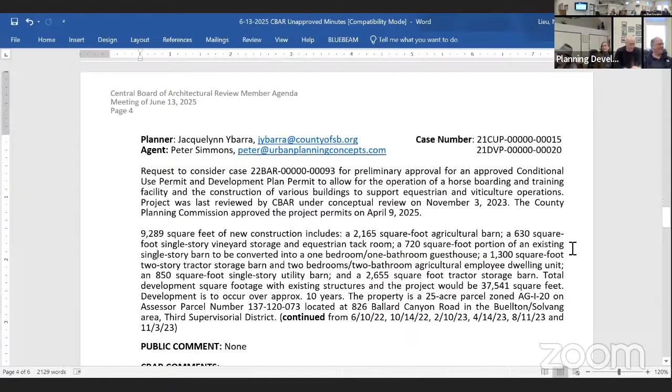Add a note to identify the color of structures- he's already got it. Number 4 is redundant, he already has it. We want to put in that number 3, it's just a little thing. What's that? Forget it, oh I forget it, never mind. Do we need to change it? Is it no good? Went right over the top of your hat. Yeah. You're just lucky I'm tired. Okay, I think that's it for that one.

Okay, the preliminary approval- that was number 6, which one was that? Rancho San Luis- San Luis, okay, yeah, or Rancho, that was 6. Number 7, right, color and materials, including both the physical board and a PDF. These are all...

Okay, we want to make sure the renderings were exact, remember how the colors were off? Well, we didn't actually say that. Sure, yeah, I don't remember. I did not say that. I thought we said it. I thought we did, he said it. He said that they weren't correct. But then you said you came back, you wanted to see them rendered correctly, I believe. I think the physical board will take care of that, no? Yeah, the physical board will answer that question directly. And I think he'll fix it anyway, because he's the one who pointed it out. Good, that the building colors were both the light color green.

Okay, so for preliminary approval, all the typical items- basically what I don't want to say is, for preliminary approval you need these things and nothing else. Right, I want to be able to say provide all the typical preliminary approval items- she has it. And where is there a list of these typical items? On the BAR application.

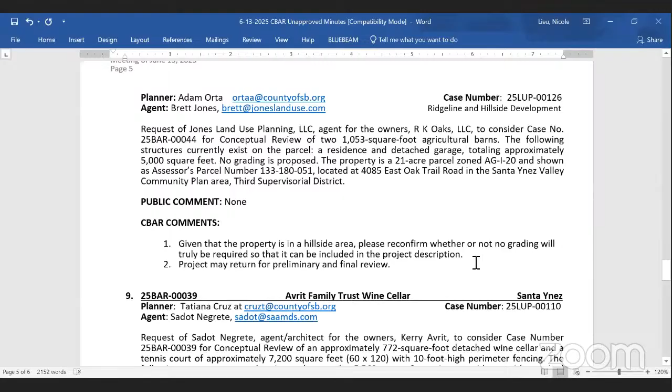I was going to say the planner's probably going to point that out to them too, because as a planner I always tell people, just say 50 cubic yards of cut and fill to save yourself. Yeah, that's kind of what I was getting at.

So given that the property is in a hillside area, confirm that this is the topo plan that was 5 feet, and that the topographic plan has a 5-foot contour interval. Please reconfirm whether or not no grading will truly be required. So stick that after hillside area.

I'm sure they're... okay, so next. This next one was... that's my conflict, so I can't. Oh yeah. I'm reading. Okay, good to me.